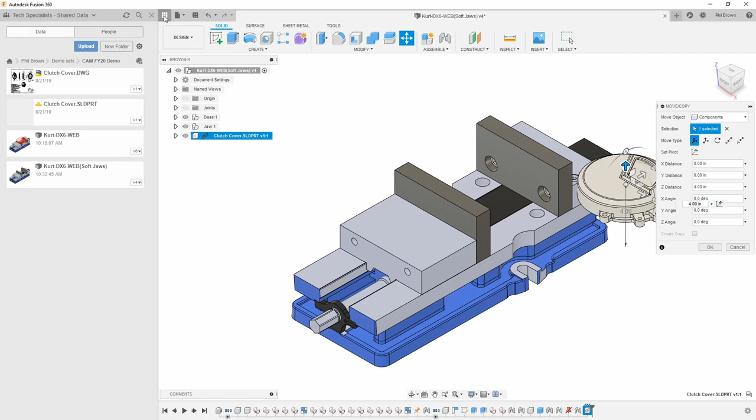Another thing you could do here is bring in your customer supplied part. The nice thing is with our AnyCAD system, you can see how my part comes in automatically, and this is still linked back to my original customer part. So when my customer decides they want rev changes, I could just get the latest and greatest, and everything will automatically update from this point forward.

One other step here, as you guys can remember, we did make that spacing block when we designed our vise, and we're now going to utilize that to our advantage. So if I go ahead and make a joint, this joint is going to be from the bottom of our part. A nice thing is on that bottom surface of your part, you could push control again, and then move to the center point. In this case, that plus sign is the center point of that bottom surface.

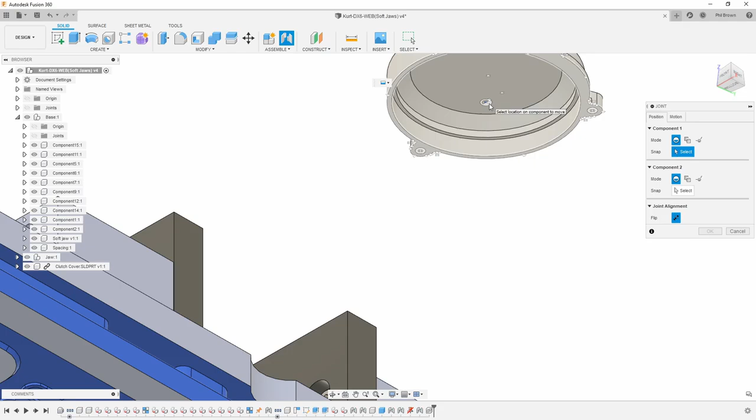And then I can flip back to my top view to my part and place that on center of that block. So now with those two components linked together, I can start to look at my block from other views. You're going to notice here, yes, my jaws don't touch, and my part is a little unrealistically low in these jaws.

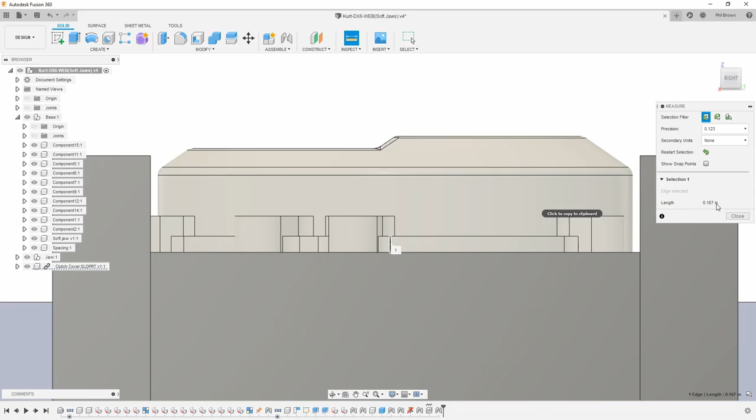So let's take a look at a couple of things here. One thing I want to do is recess this part 167 thou inside of our jaws. So close this out, we're going to get repositioned here, and I'm going to go into my parameters table. Again, when we built our parameter table, Part D was our part depth. I can come in here and paste that, click it, and put 167 deep. As soon as I click off there, you're going to notice my part moves way up.

So one thing here that's now looking a little unrealistic is why waste the material and use 3-inch tall jaws? Let's go to a 2-inch tall jaw. As well, 6-inch wide still seems very standard for my vise. Maybe we want to switch up how wide we're spaced. Again, we're not really making contact here, so let's step this down to roughly 3 inches.

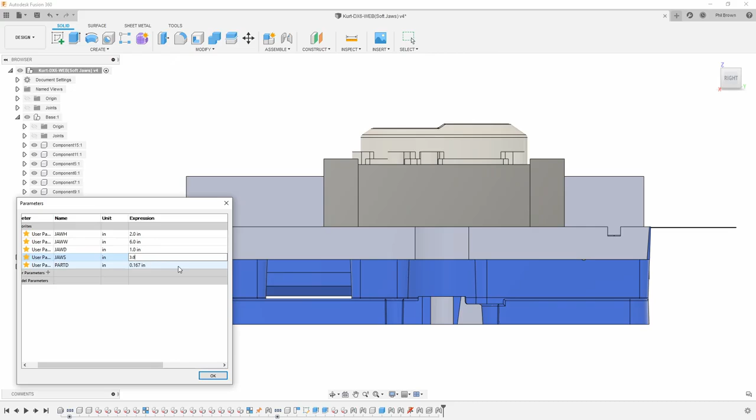Well, in the case of 3 inches, we're starting to look a lot better at what we're doing, but we just have almost no material on this backside for this part. So the last step I'm going to do is step this up to say 1.5 inch jaws. So 1.5 inch by 2 by 6-inch jaws seem to be perfect for what I'm trying to do at this moment.

So now with that all being said, we can go through a couple steps here to cut those jaws. The first step I'm going to do is go ahead and say let's do a combine. Let's pick my jaw. Notice how it says cut, and it's looking for a tool body. So let's go ahead and pick that actual part.

If your part is not linked, before you hit OK, make sure you check mark keep tools, because in the event that you don't, what's going to happen is this tool body, aka my part here, is going to disappear. And you're going to regret that when you go to do the same thing again and do your next combine function to your backside jaw.

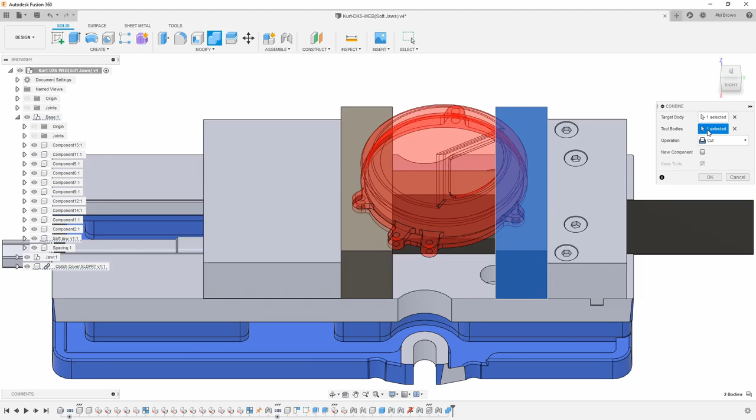Again, the order that you do these in doesn't matter, front jaw, back jaw. In this case, your target body always needs to be the jaw, and your tool is going to be your part that you're utilizing. So now I'm going to go ahead and hit OK.

And if we actually take a look at this here, I'm going to turn off the actual clutch cover itself. And now you can see how I have an exact profile extruded down into my part.

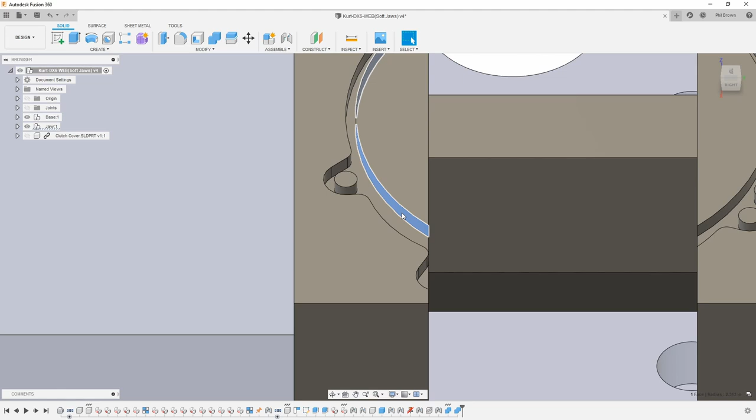So a few things you guys are probably questioning right now is how do we get rid of those features, or how do we make this a little easier to manufacture? Well, with our direct model editing, I can click one of those surfaces and hit delete. The same thing with my screw hole, I can hit delete, as well as this backside here, I can click it and hit delete. So now that I removed all those features, I tend to clean up everything on my vise.

One other question you guys are probably wondering is if I open and close my vise linear in this direction, that part's not going to slide out of there very nicely. We have two ears that aren't necessarily put in a position that makes that doable. So you can always come in and modify this as you go. A nice easy way to do that is to go in, go to your soft jaw here, and activate it.

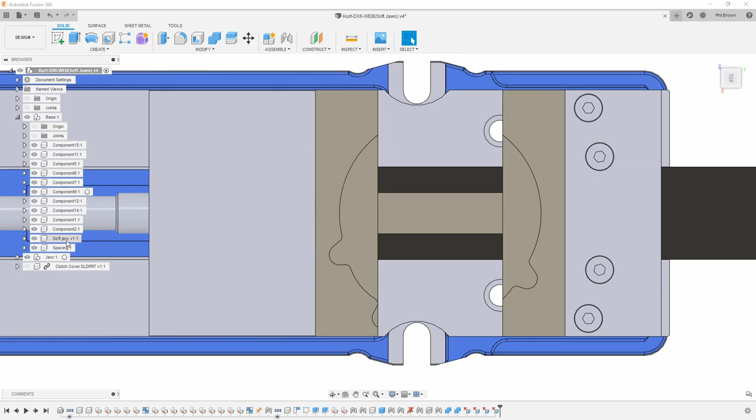Then we could start sketching on top of that. I'm going to go ahead and create my sketch on top of that face. One thing you're going to notice, depending on your settings, is whether or not it actually sketches and projects that sketch. But now we can utilize that to our advantage.

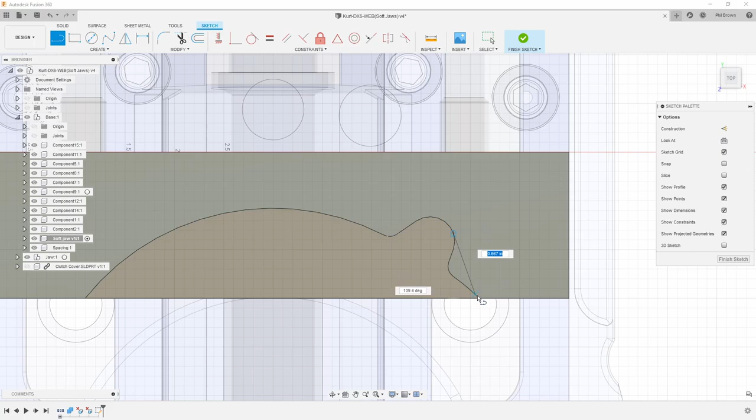One thing you could do is hit your line command, and in this case I could put this more parallel, or create this to go down and out. A couple things I'm going to do here is put this point here. Let's use a couple constraints like tangent, for example—this line needs to be tangent to that arc. And then let's put this guy parallel to this one over here.

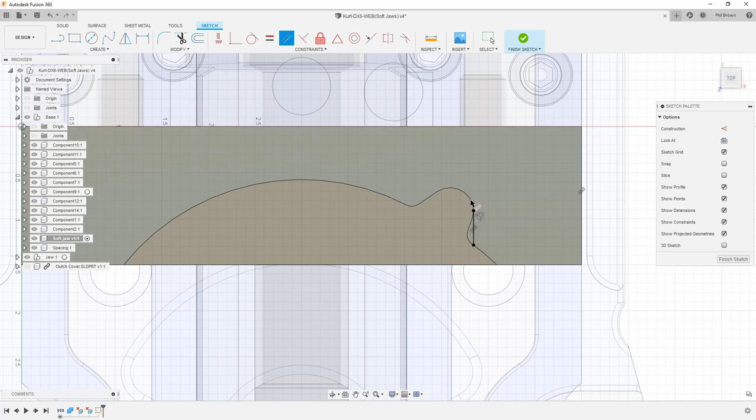Once you sketch out that feature, the nice thing with the parallel here is your part will slide straight out because you're tangent and set straight from there. I can come back and extrude that feature out, so I can now do an extrude command.

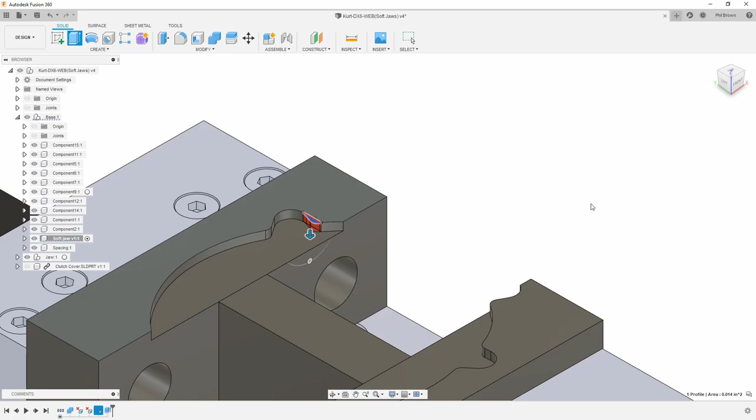I can click that feature, click the bottom of my pocket, and if I rotate down and take a look at this a little closer, you have the freedom to see what's going on there. Let me get this positioned a little better—we're extruding off that side of that ear. I'm going to hit OK, and you'll notice it cuts that body for me, and now that part should slide in and out.

For time reasons, I'm not going to do the other side, but the process is still the same: go find that jaw wherever it may be, activate it, and then create your sketch. The reason you want to activate it is so your timeline constantly maintains what's going on with that actual body, as you can see here.

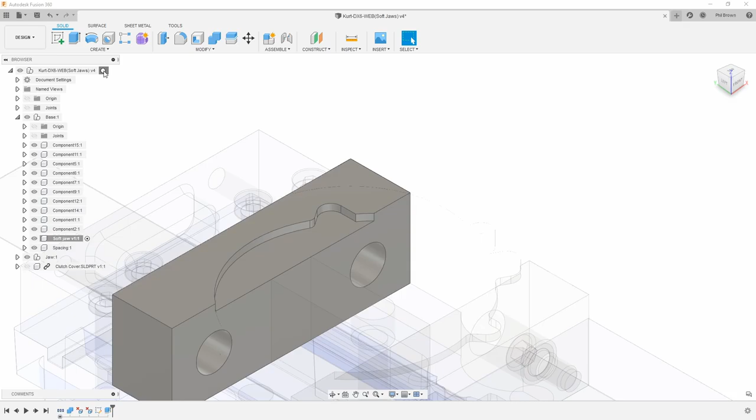So when I activate back at my top level, everything's going to come into my timeline from start to finish that I've been working on. From here, you have the ability to go machine these guys out.

What I personally like to do at this point is take that bottom spacing block and turn it off, then move to my manufacturing area. The reason you want to do that is, one, you don't want extra things in your way that you'd have to worry about crashing into, and the other reason is it's just nice for visual purposes.

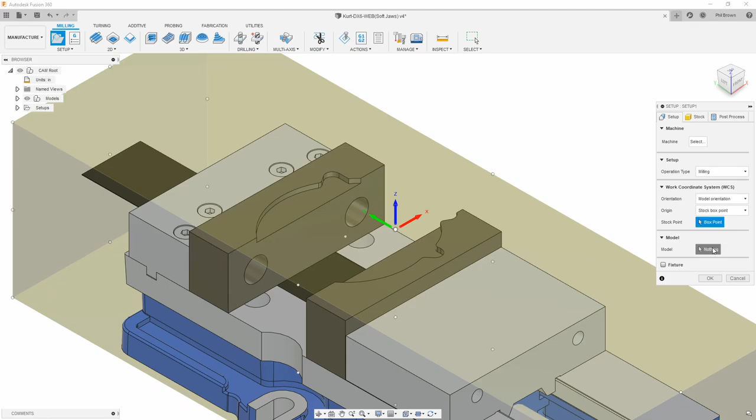From here, I can create my setup. I'm going to go ahead and pick my model body, which is going to be my block in the back. One thing I personally like to use is setting the stock offset to 0. Given that this is 1.5 by 2 extrusion, the stock size isn't overly going to matter for what I'm doing.

A few other steps you could do at this point is add both of those bodies in, and then machine from there, as well as notice where my orientation is. If you remember how I set up my orientation, I want to go off my model orientation, which in this case would be the top of that block we designed.

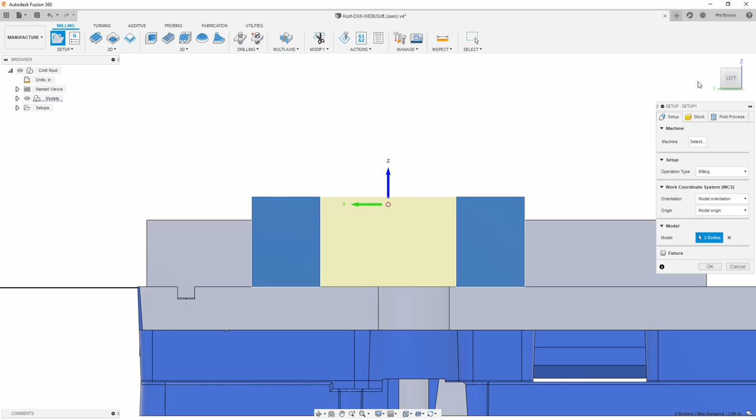So if you were to come down, touch the top of your part, then compensate down that negative 1.60, I can utilize this same offset for my jigs, as well as for making my part in the end. Let's go ahead and hit OK here, and then I can go in and do some tool paths.

I'm going to use a 2D adaptive clearing to clear out this pocket. I'll click the bottom of the pocket as a whole, and if you want, you could add stock contours—not necessarily needed since you do have that open void between the part. Let's get us an end mill, and we'll utilize that for what we're doing here.

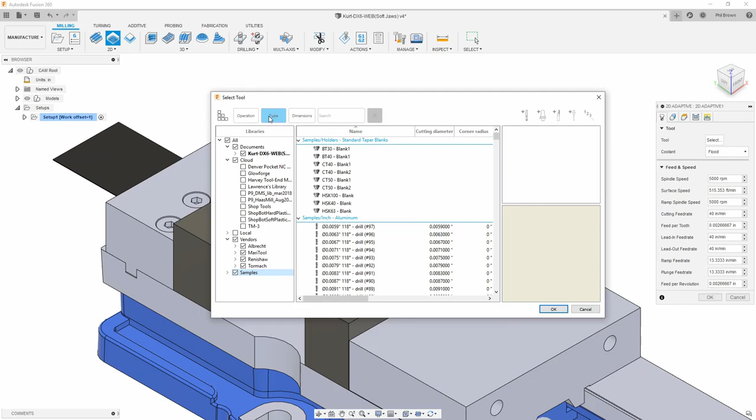So, sampled library, and we could pull a half inch flat possibly and utilize that for what we're doing. With that being defined, your pocket is selected, your heights are selected, and you can change your step over, step downs, and anything of that nature. The idea here is you're adaptively clearing out that pocket.

So I can repeat this function here, or edit it and pull that other pocket, and hit OK. Now you can see how I'm clearing out both sides.

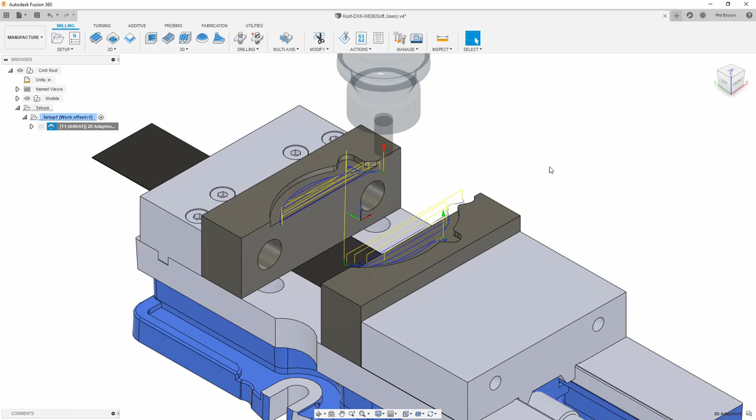So the nice thing is, here's when we move on to the next step. Let's say we finished out our vise jaws and everything—I can go ahead and turn back on my part and create another setup. Now if we were to go in and machine this part, it's nothing more than creating my setup, and this time, instead of my jaws, let's go ahead and pick my part.

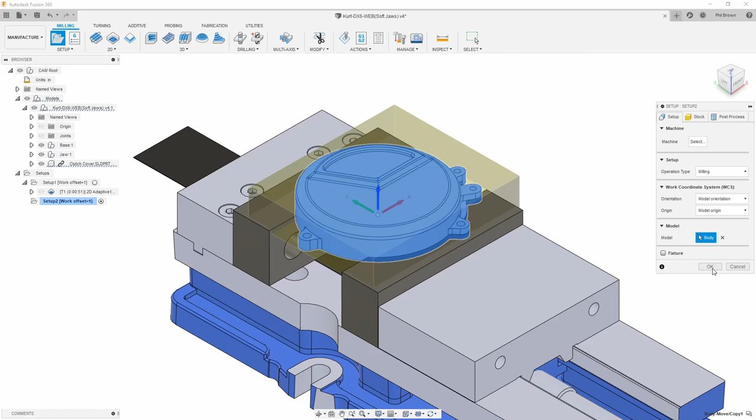This is up to you how much you get into this—just remember that you also want to go to model origin and have your model orientation set the same. We did this all when we set up the vise to make life easy, but we're going to utilize that same exact point from when we machined our jaws as we're going to do for machining this part from the top down.